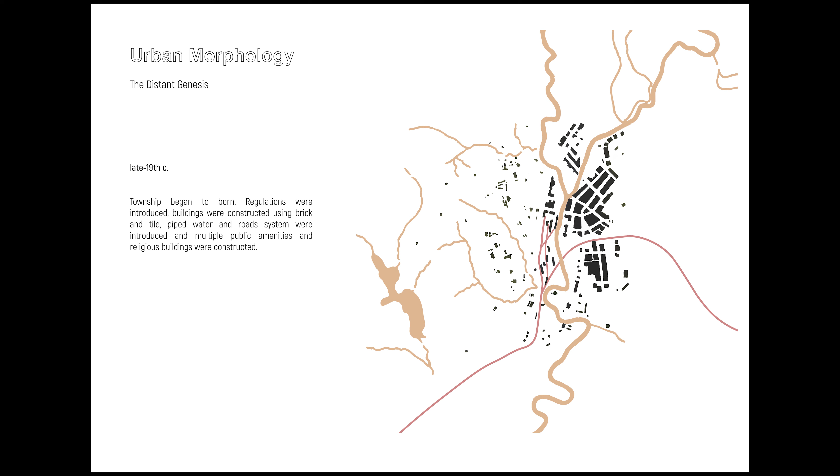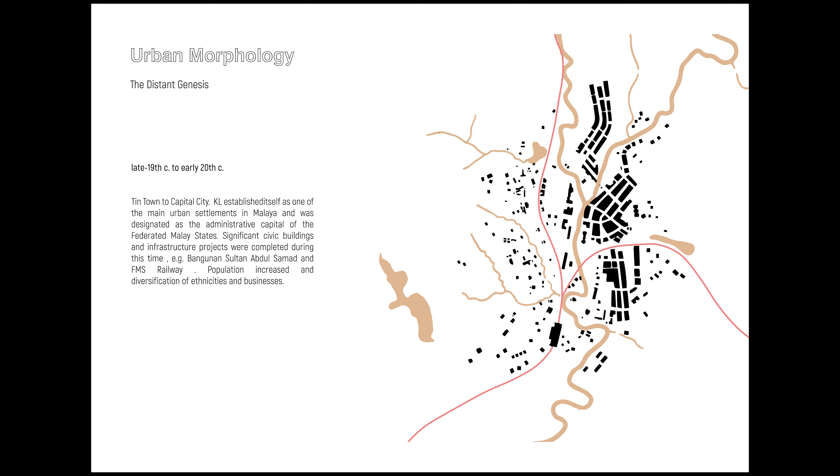During the late 19th century to early 20th century, the tin town transformed into a capital city. Kuala Lumpur established itself as one of the main urban settlements in Malaya and was designated as the administrative capital of the Federated Malay States. Significant civic buildings and infrastructure projects were completed during this time. Population increased and diversification of ethnicity and businesses happened.

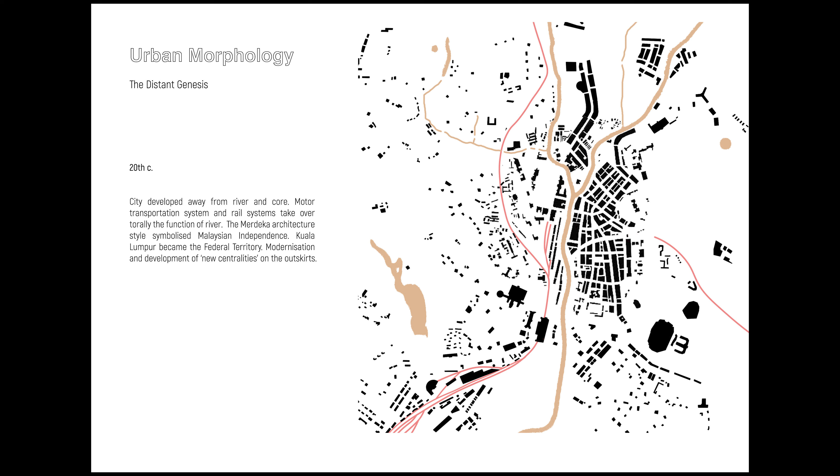In the 20th century, the city developed away from the river and core. Motor transportation and rail systems took over totally the function of the river. Kuala Lumpur became the federal territory. Modernization and development of new centralities on the outskirts started.

From the early 21st century to present, the riverbank was concreted, transforming the form of natural banks to a monsoon drain like. With the completion of major projects across Greater Kuala Lumpur, the population and development spread away from the historical core.

A major commuter rail project was recently completed, and city improvement plans such as the River of Life are planned to improve the livability of the historical core area.

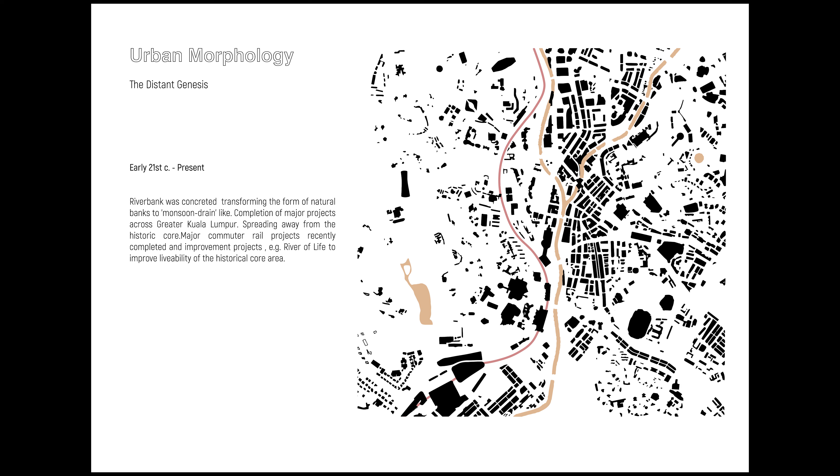On the west bank is the institutional district, situating here are the heritage buildings which formerly housed the government offices. On the east bank is the Petaling Street Precinct Heritage Quadrant, which houses mixed-use commercial activities and may also include cultural spaces of religious temples, galleries, and museums.

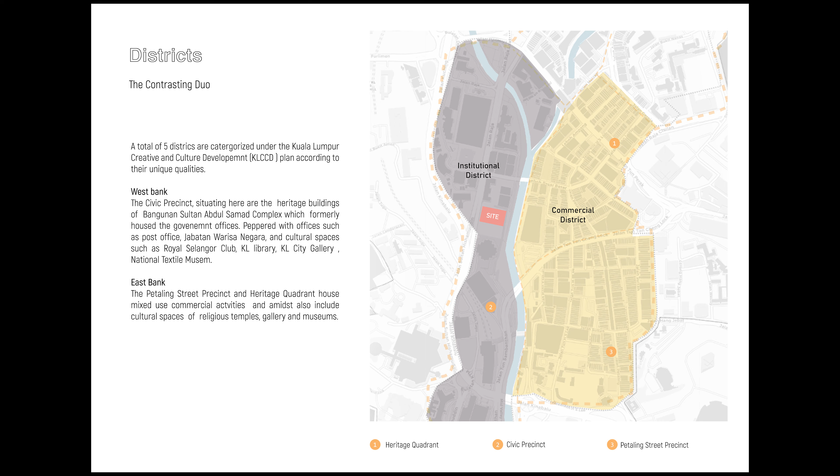On the west bank, many of the heritage buildings formerly used as government administrative offices sit vacant in need of repurposing to the benefit of the public. A couple of them have been transformed into museum and gallery spaces.

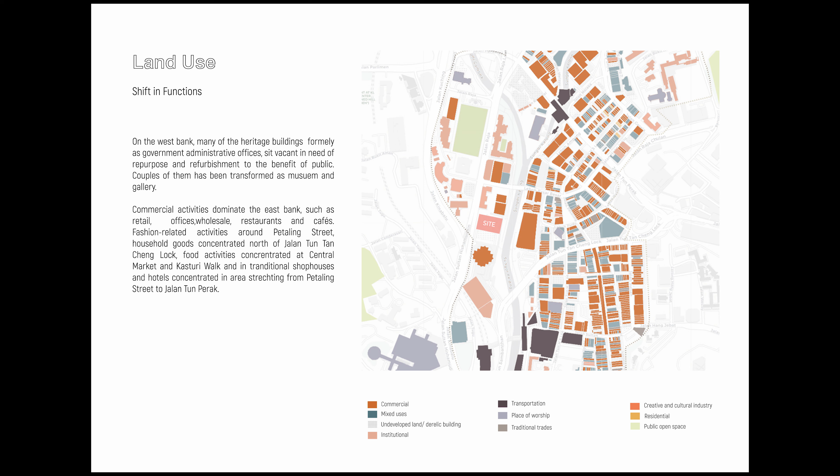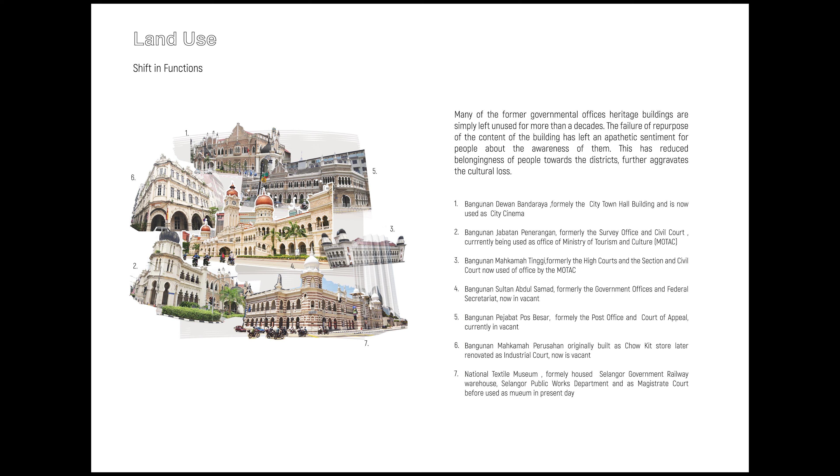Commercial activities dominate the east bank, such as retail offices, wholesale, restaurants, and cafes. Many of the former government offices' heritage buildings are simply left unused for more than decades. The failure to repurpose the content of the buildings has left an apathetic sentiment of the people about the awareness of them. This has reduced the belongingness of people toward the district.

Traditional trades are the legacy of intangible heritage. They form and display the special character of a society.

Local nodes are for daily usage and working purposes. Tourists and locals seldom cross paths to have meaningful interaction and exchange.

Introduction of a new cultural experience center with complementing programs that benefit both the locals and tourists will bring life and help rejuvenate the district. The site has high permeability and accessibility with various transportation infrastructure nearby.

However, due to the main activities on site being for running errands, working purposes, and many vacant buildings, it is hard to attract the interest of people.

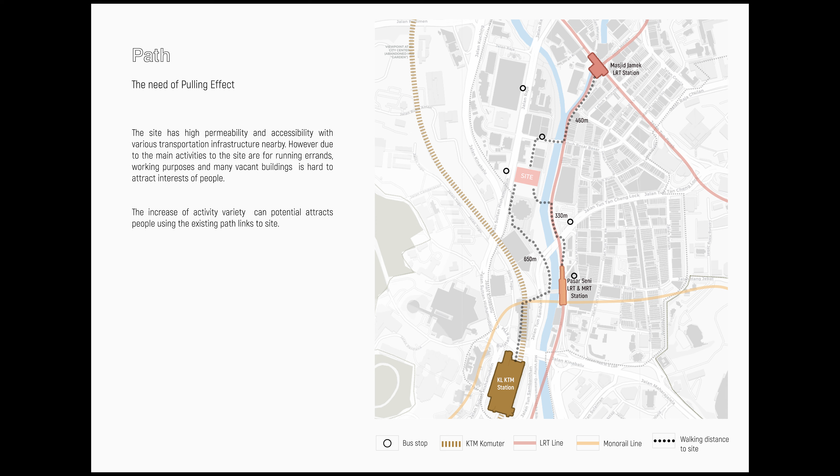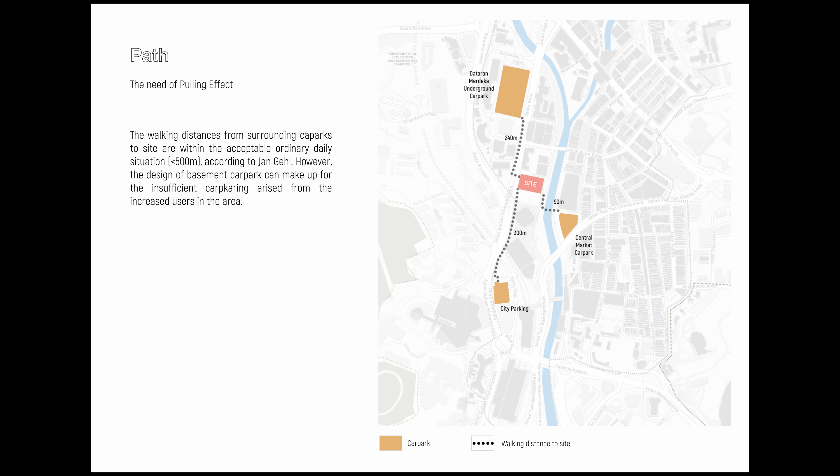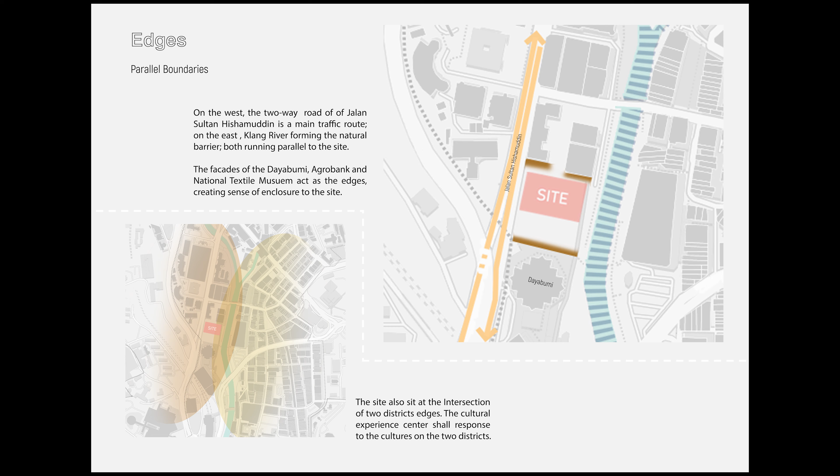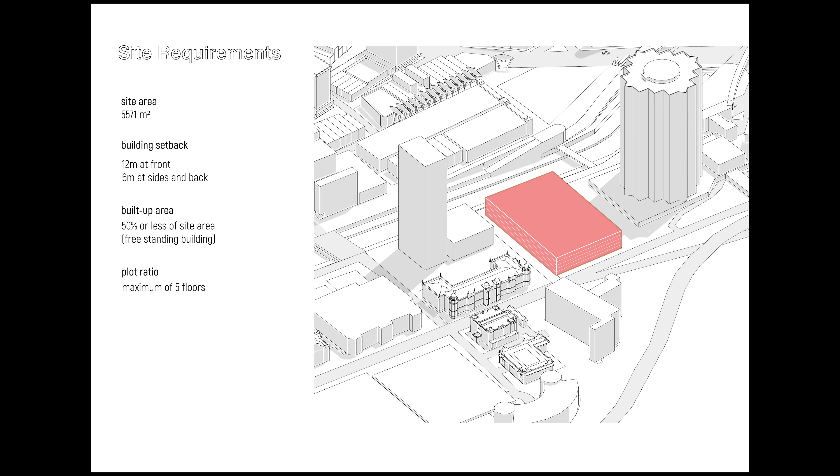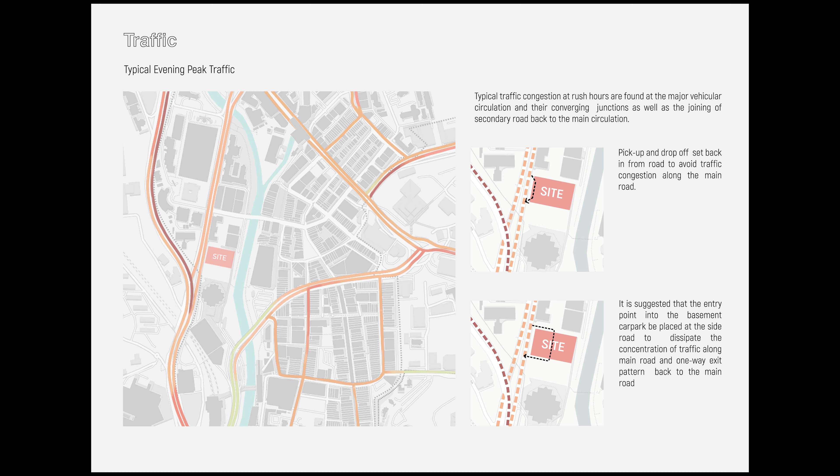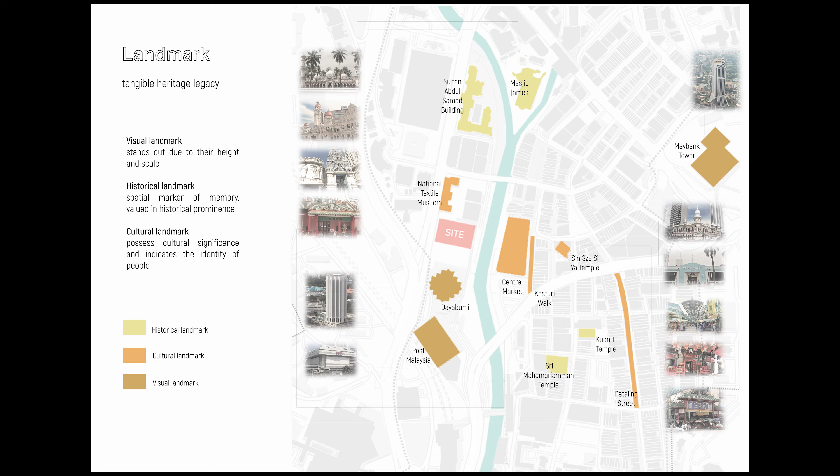Cultural landmarks possess cultural significance and indicate the identity of the community, such as the National Textile Museum, Sin Sze Si Ya Temple, Central Market, Kasturi Walk, and Petaling Street. These landmark buildings are part of the identity of a tangible legacy asset.

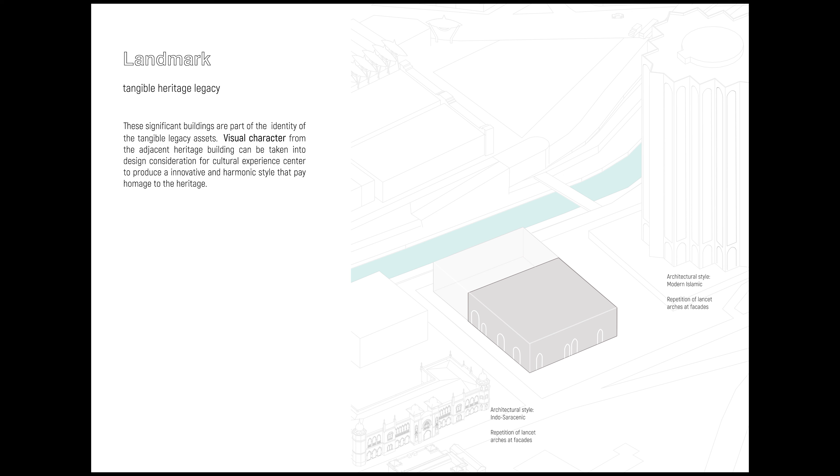Visual character from the adjacent heritage buildings can be taken into design consideration for the Cultural Experience Center, to produce an innovative and harmonic style that pays homage to the heritage. Historical and cultural buildings tend to be low in height, while the newer addition structures tend to be towering for functional purposes.

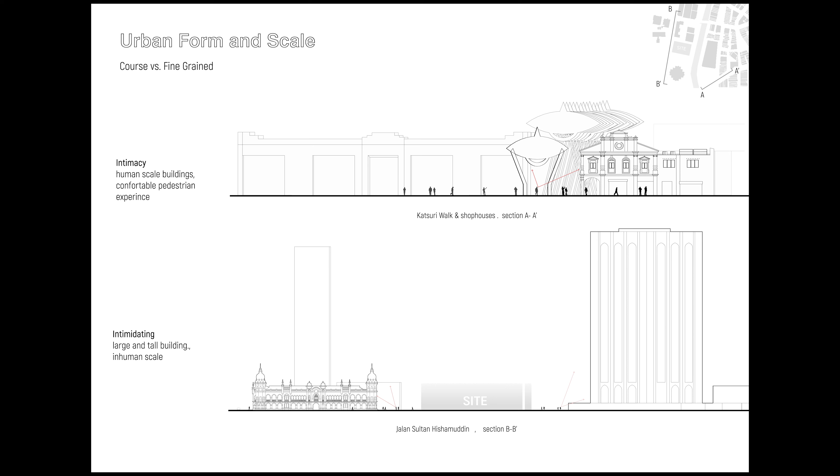Intimate and comfortable pedestrian experience can be found at the commercial district due to the human scale building. The walking experience at the institutional district is intimidating due to the large and inhuman scale building. At the site, random high-scale buildings are scattered within the low structures, forming a disparity of persistence. Form of adjacent buildings display a sudden change from horizontal building form to vertical building form.

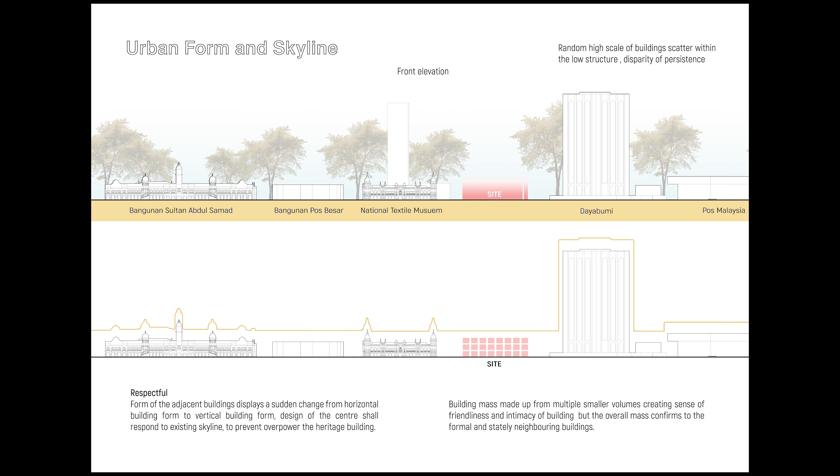Design of the centre shall respond to the existing skyline to prevent overpowering the heritage building. It is suggested that the building mass is made up of multiple smaller volumes, creating a sense of friendliness and intimacy of building, but the overall mass conforms to the formal and stately neighboring buildings.

Pedestrians reach the site via train and bus station, thereafter dispersing from the primary roads onto secondary roads used by workers and shop owners. At noon, pedestrians approach the in-between spaces occupied by street food vendors such as Kasturi Walk, Petaling Street, or other pedestrian paths for lunch.

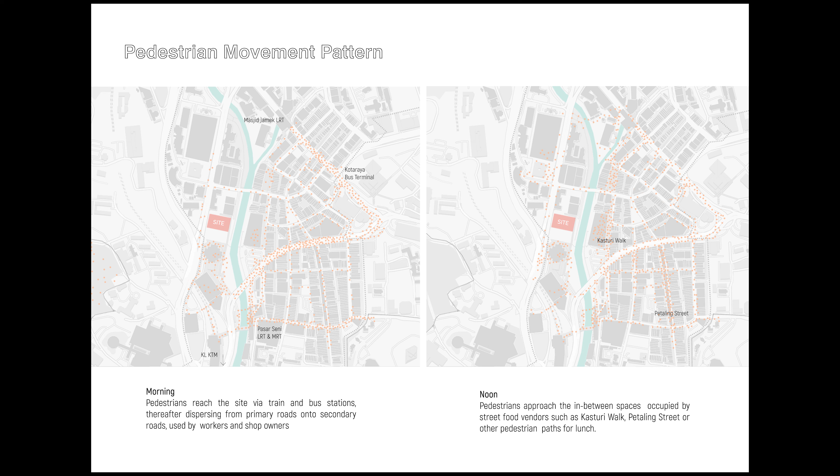In the evening, street life concentrates at Petaling Street after working hours, with Dataran Merdeka used by the public for recreational purposes. The lack of optional activities available compared to Kasturi Walk and Petaling Street means the institutional district is dominated by working and tourism purposes.

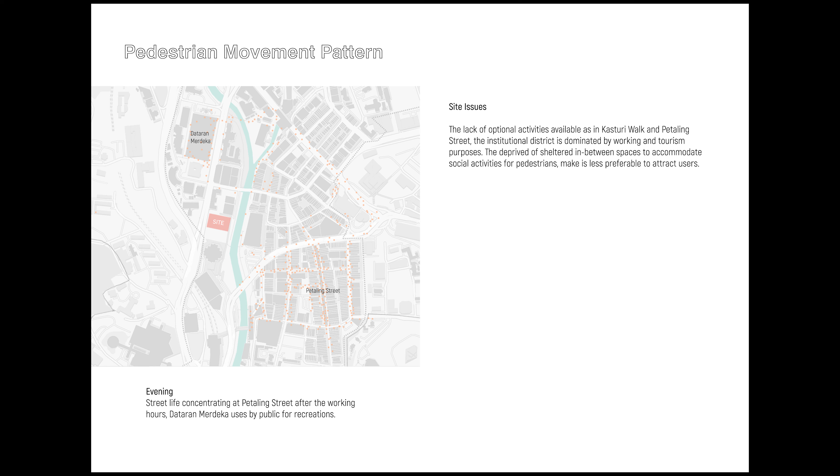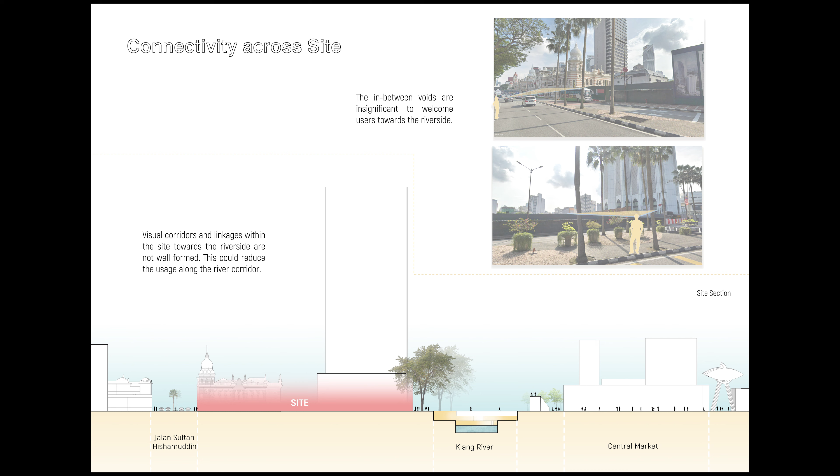The deprivation of shelter in the in-between spaces to accommodate social activity for pedestrians makes it less preferable to attract users. The in-between voids are insignificant to welcome users toward the riverside. Visual corridors and linkages within the site toward the riverside are not well formed. This could reduce the usage along the river corridor.

The big open spaces between the buildings expose the site to almost all of the sun path. Lack of shading by adjacent structures increases the solar radiation received. The prevailing wind to the site comes from east-northeast, southwest, and south directions, averaged throughout the year.

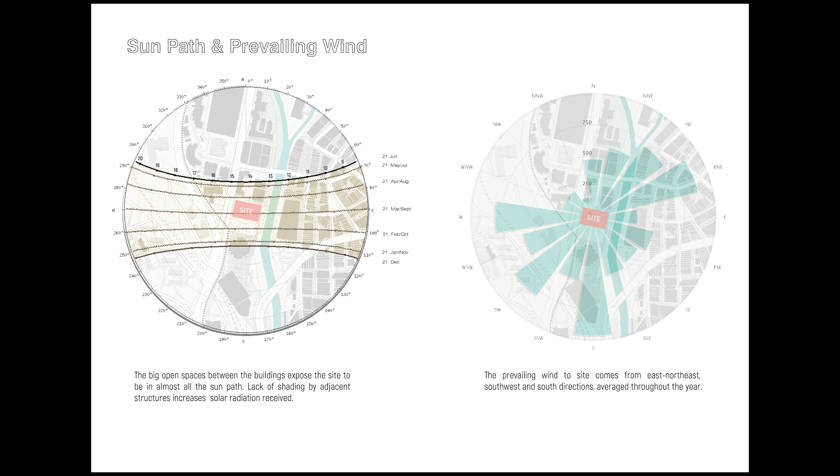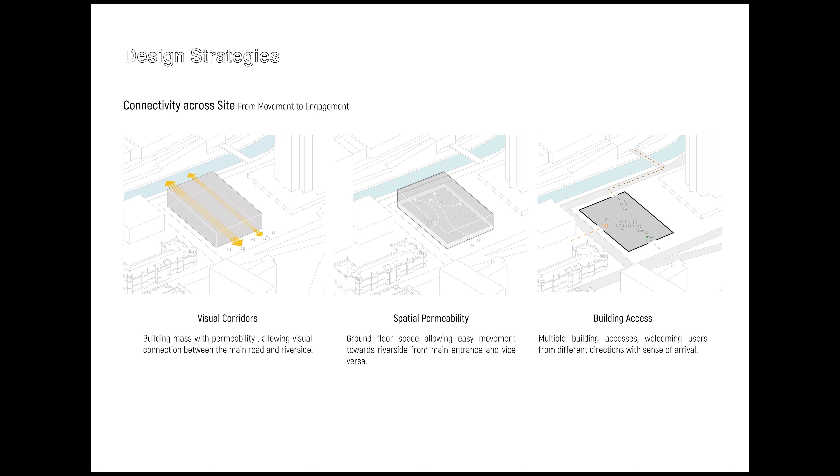To facilitate connectivity across the site, from pedestrian movement to engagement, visual corridors shall be formed. Building mass with permeability allows visual connection between the main road and the riverside. Spatial permeability at the ground floor space allows easy movement to the riverside from the main entrance and vice versa. Multiple building accesses shall be made to welcome users from different directions with a sense of arrival.

Partly shaded space for outdoor events at the riverside of the building creates a suitable leisure space. Spillage of activities from the building complements the future riverside recreation park.

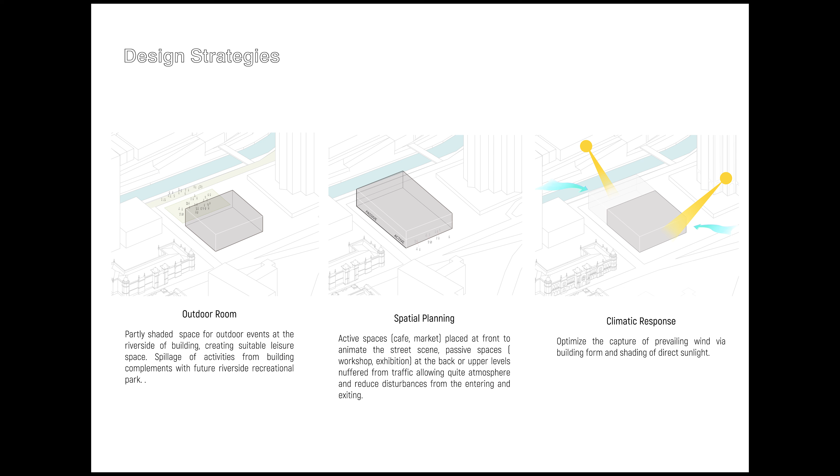In spatial planning, active spaces shall be placed at the front to animate the street scene. Passive spaces at the back or upper levels buffer from traffic, allowing a more quiet atmosphere and reducing disturbances from entering and exiting. Climatic response shall optimize the capture of prevailing wind, building form, and shading of direct sunlight.

The west side has more vegetation density and in-between spaces for individual buildings, whereas the east has high building density, leaving scant spaces for vegetation.

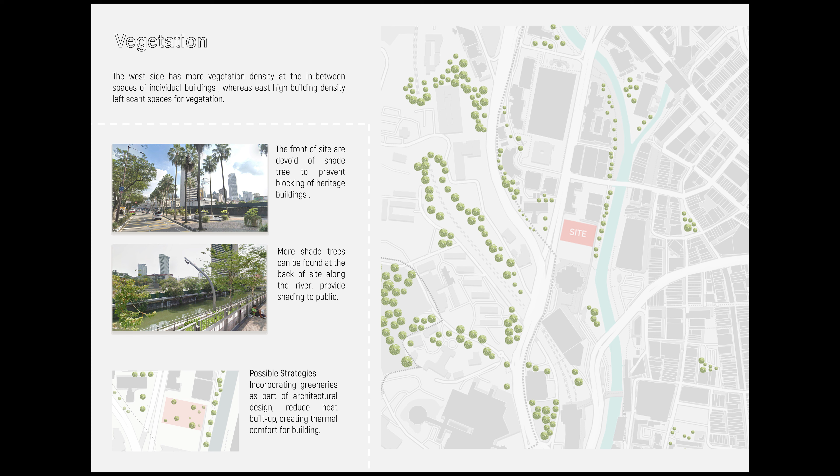The front of the site is devoid of shade trees to prevent blocking the heritage building. More shade trees can be found at the back of the site along the river, providing shading to the public. A possible strategy is to include greenery as part of the architectural design, to reduce heat build-up and create thermal comfort for the building.

In line with the city vision, art is used as a medium and catalyst for city upgrade and redevelopment, promoting an aesthetic lifestyle and public space that ultimately benefits the urban community. Changde is a medium-sized modern city with rich culture and a thriving industrial economy.

Meantime, cultural and spiritual development is seen as capable of influencing the economy, building a new city with injection of collective memory.

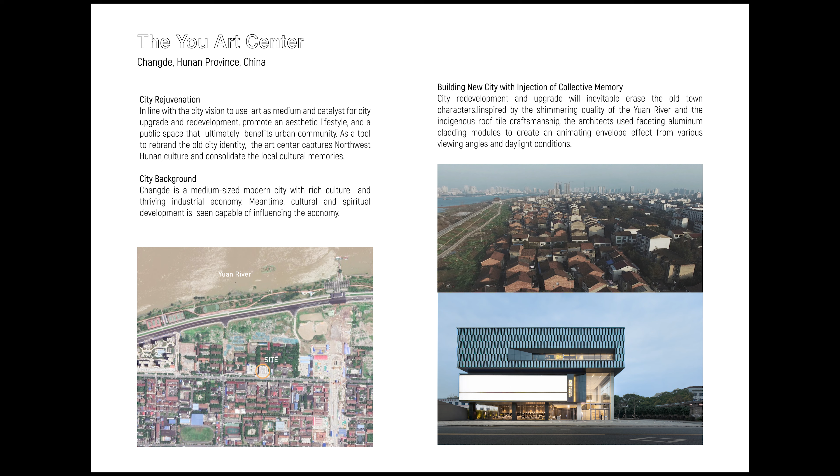Inspired by the shimmering quality of the Yuan River and the indigenous roof tile craftsmanship, the architect used faceting aluminum cladding modules to create an animating envelope effect from various viewing angles and daylight conditions.

The program houses an exhibition and event space to educate the public about the Changde City Development Plan, strengthening public awareness about the city they live in.

A sand art gallery is at the central atrium, acting as a circulation space for artist gallery, event, and social exchange. Exploring the gallery is like a stroll through the town in vertical fashion, encountering different activities and interaction along the way. The Kids Education Center helps expose artistic culture to the young minds of Changde, aiming to propose artistic culture by inspiring and engaging the young.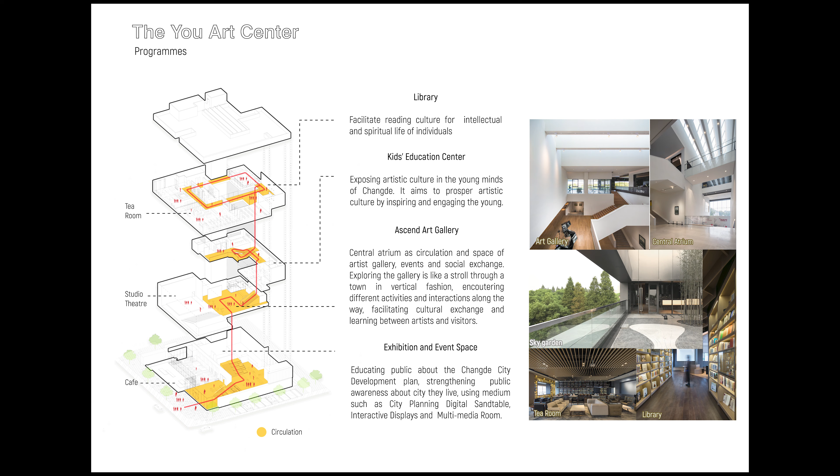In spatial planning, the active spaces are placed at the front to animate the street scene. Passive spaces look to the back to reduce disturbance from the traffic at the front, giving users a peaceful environment for exhibition. The ground floor design has high accessibility to engage pedestrians from front, side, and back of the building, all converging to the central exhibition and event space.

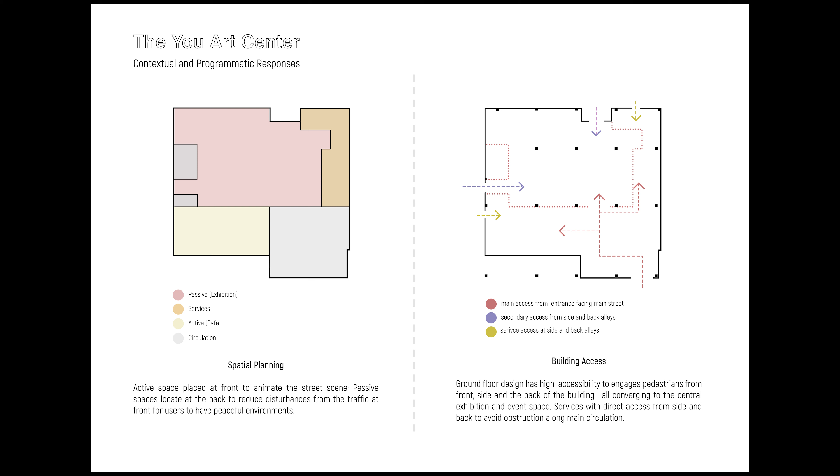Services have direct access from the side and back to avoid obstruction along the main circulation. Multimedia exhibition spaces at the gallery are placed at the lower floor for general public usage. The Kid Education Center is placed at a higher level to provide a conducive learning environment. The topmost floor is for reading purposes, to lessen disturbances from the active social activities.

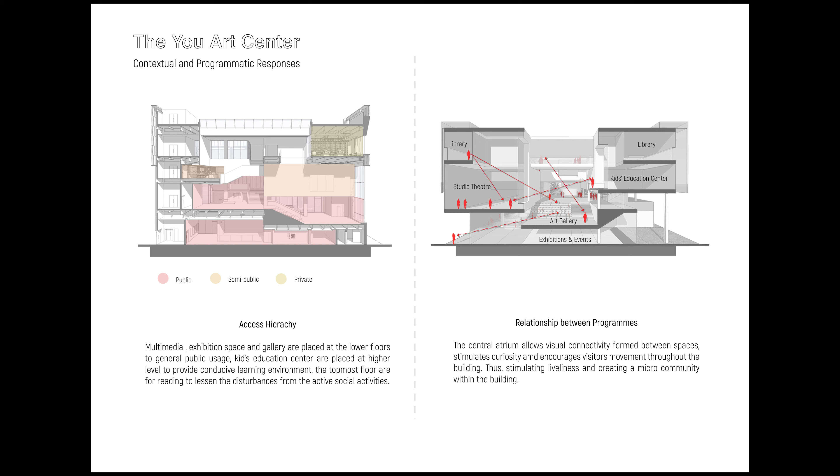The central atrium allows visual connectivity between spaces, stimulating curiosity and encouraging visitor movement throughout the building, thus stimulating liveliness and creating a micro-community within the building. The re-establishing of cultural nodes which promote positive artistic culture helps rejuvenate the city, with its activity complementing the growing creative community and bringing forward economic opportunity.

How does it relate to the KL site? The node could attract the interest of people and bring life to the once disinterested district, which in turn could boost commercial opportunity for the neighboring area. A virtuous cycle could be formed between the cultural and commercial symbiosis.

Singkawang's community is diverse, made up mostly of Tionghoa, Dayak, and Melayu. This diversity enriches Singkawang with abundant art and culture. The trend of cultural decline is due to the younger generation preferring to move outside of Singkawang to seek a better life. In response, a new node consolidates Singkawang culture by turning an almost inactive cinema in the city into a cultural center that promotes the culture and art of Singkawang heritage.

It continues the original function of the cinema while adding new functions catering to the growing community's needs, a space that creates new memory for the young while connecting them to the past.

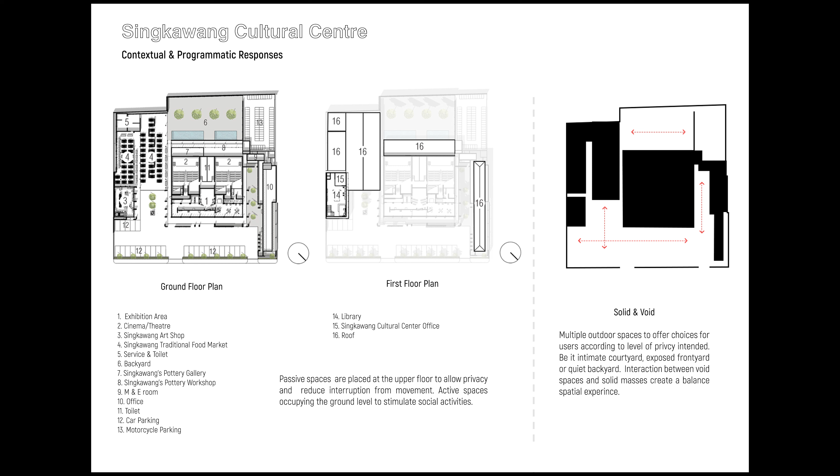There are multiple outdoor spaces offering choices for the user according to the level of privacy intended, be it an intimate courtyard, an exposed front yard, or a quiet backyard. Interaction between the void spaces and the solid masses creates a balanced spatial experience.

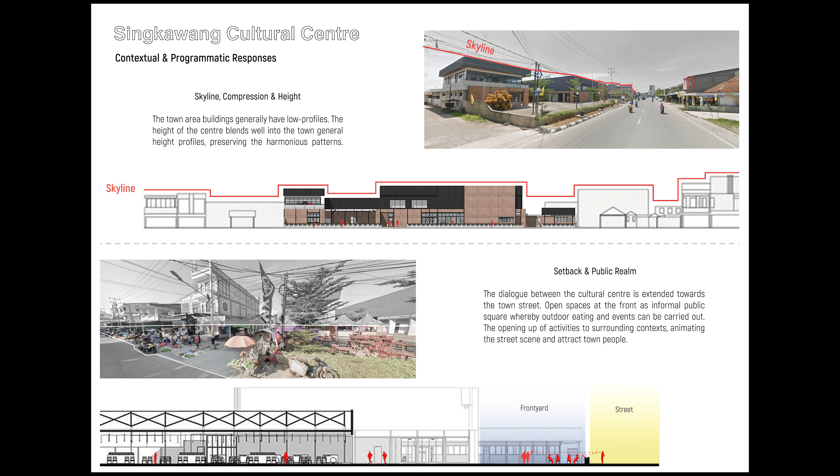The town area buildings generally have low profiles. The height of the center blends well into the town's general height profile, preserving a harmonious pattern. The dialogue between the cultural center is extended to the town street. Open spaces at the front act as an informal public square whereby outdoor eating and events can carry out. The opening up of activities to the surrounding context animates the street scene and attracts the townspeople.

In recent years, apart from the more formal public cultural spaces, there is a rising trend of private creative venues in the historical core area. The newly opened Zhongshan building has been repurposed as a creative hub, indicative of the growing creative hubs and spaces in Kuala Lumpur.

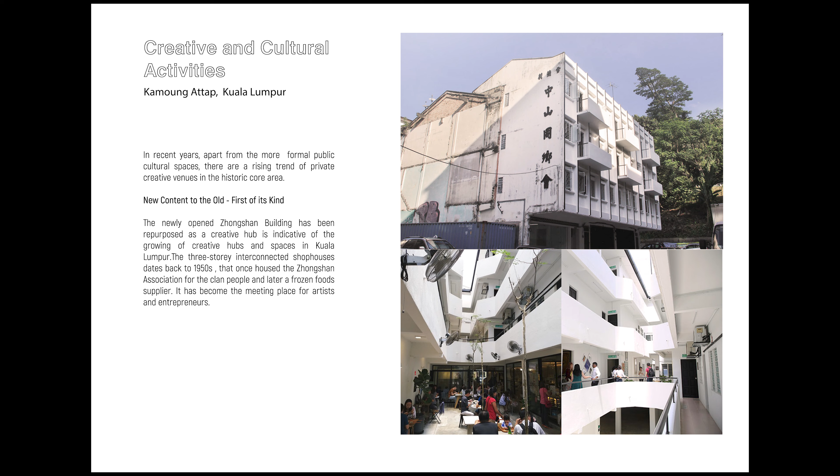The three-story interconnected shophouses date back to the 1950s, once housing the Zhongshan Association for the Clans People, and later a frozen food supplier. It has become a meeting place for artists and entrepreneurs, housing exhibitions, a tailor, barista, vintage music store, research center, and several libraries.

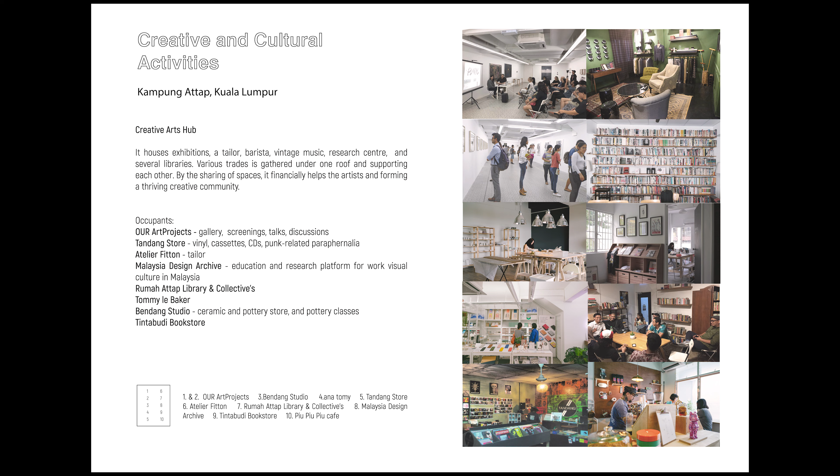Various trades are gathered under one roof, supporting each other. The sharing of spaces financially helps the artists, forming a thriving creative community. The resulting impact is that more customers are attracted here, profits of artists grow, allowing the artists to expand. Other creative industries have started following its footsteps. Artists and people are once again interested in coming back to downtown Kuala Lumpur.

About one-fifth of the business types in the area are textile-related industries, including the traditional textile trade. The National Textile Museum showcases the collection of local textile, which is part of our rich cultural heritage. However, visitors are only able to learn the heritage passively. We propose an interactive textile learning experience for the public, also as a creative hub for individual and collective artists with entrepreneurship that promotes sustainable textile production process.